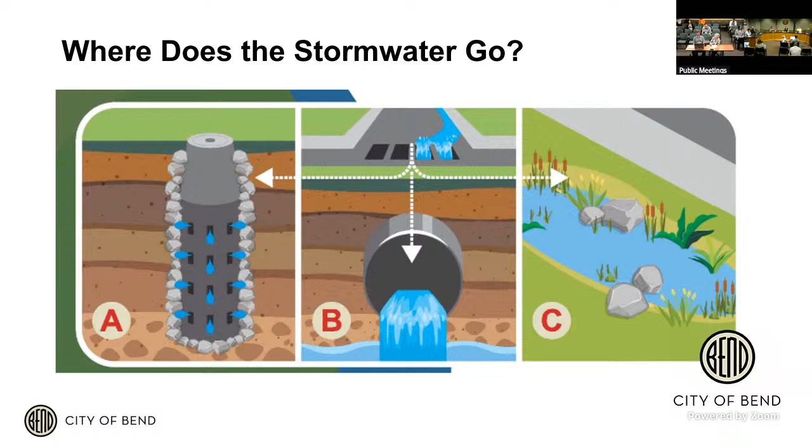So again, fairly dispersed. It doesn't go in a pipe that goes to the treatment plant, and that's really important to understand here. Picture C shows the idea that in some places there are ways to cleanse that stormwater before it gets into the groundwater or the river. That's why we have regulations. The city actually has permits from DEQ for stormwater discharge and management, and I'll get into that on a different slide.

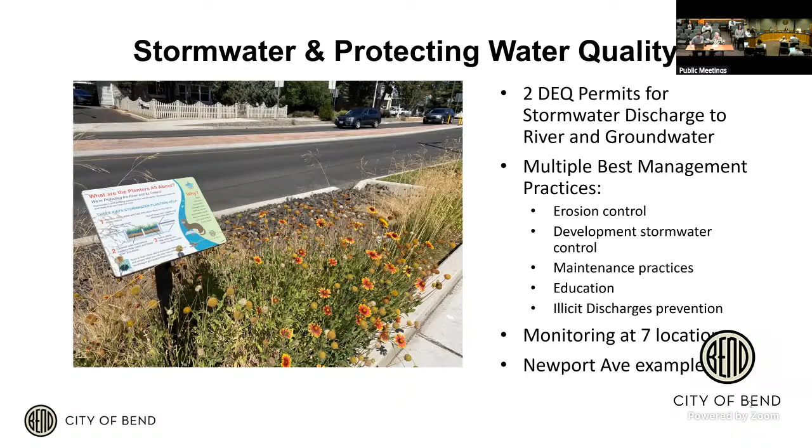We monitor at 7 locations across the city to see what the quality of the stormwater looks like. This picture shows the Newport Avenue project, which was largely a stormwater project that we then added other elements onto. So that's it for me, and I should hand it over to Austin to tell you what's now going to be in the master plan. Just wanted you to have a little context of how the stormwater system works.

Thanks, Lori. So today we're going to give you a brief update on where we're at right now with the master planning process, and here's a look at the topics we're going to get into. Like Lori mentioned, similar to a water system master plan or collection system master plan, the stormwater master plan is highly influenced by the 2 stormwater permits. And as she showed and demonstrated, our dispersed system kind of separates from that water and sewer collective network that we have.

The purpose of the master plan effort was to provide an update to the 2014 stormwater master plan, and primarily to identify the capital improvement program. So like Lori mentioned, the 2 main efforts were to identify projects that will, first, improve drainage issues that we have throughout town, and second, identify water quality improvements we can do for discharges into the river. Along with those core capital program efforts, we also took a look at a handful of policy topics, mostly climate change, drainage and density, and level of service that we'll get into here.

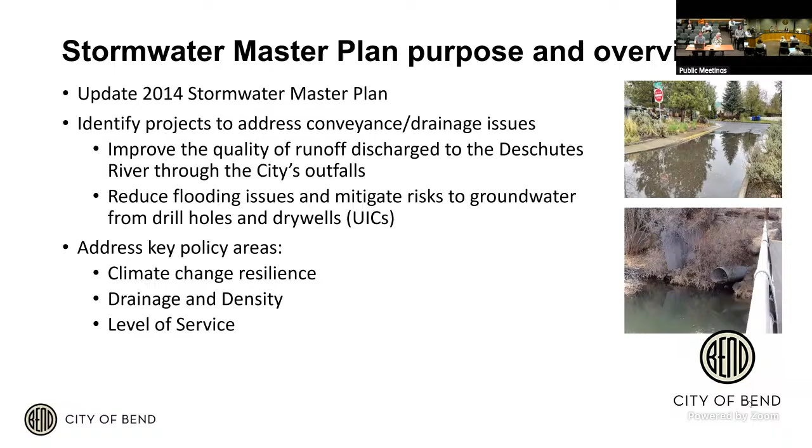So right up here we have an overall timeline. I printed some handouts, so I'm not going to get into too much detail, but if there are any specific questions about our timeline and process, I'm happy to answer some questions here at the end of the presentation.

During the project, we did a number of outreach efforts. The primary audience we worked with was the Water Advisory Group, and they were really our main sounding board of external stakeholders throughout the community, from our visioning to establish our values, and then through our scoring and evaluation of these capital projects.

They were the major sounding board that we had, but they also weighed in on some of those policy topics that we mentioned. Amongst the other groups, we had a roundtable discussion with some of the local engineering firms in town, thankfully held by AKS. We did a presentation to COBA, giving them an update of the draft findings and efforts that we were doing.

Internally, we had a lot of discussion, not only workshopping to identify the issues and problems, and reviewing some of the capital projects, but also particularly with the drainage and density policy topic, working with our engineering planning groups to dig in a little bit about some of that topic.

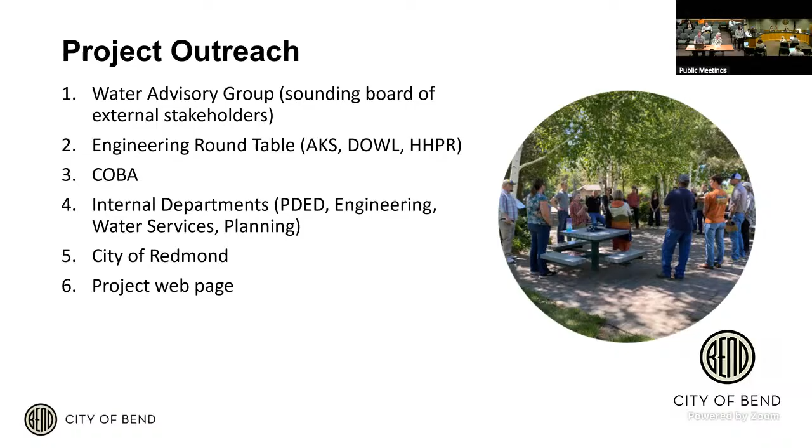All right, so onto the capital improvement. Again, this is really kind of the meat and potatoes of a master plan. Taking it all the way back, we did a series of workshops to identify the issues, and then identified our priorities — what were the things that we really wanted to weigh in on to help score these projects.

From there, we basically developed a matrix that we then ran all of our known issues through, and ultimately that provided us a list of capital projects. You can see a snapshot map here.

The blue and the orange stars distinguish between a drainage project — more of a local flooding risk perspective — whereas the orange identify projects that have a water quality focus, or a combination of the two. Most of those are discharges to the Deschutes River.

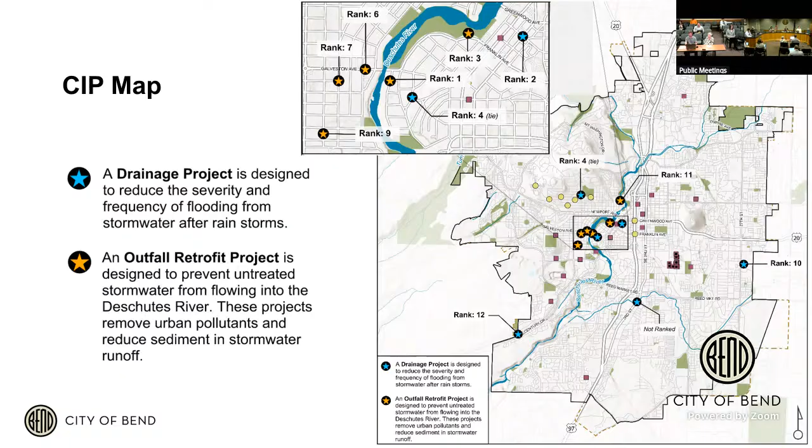Here you're going to see, and I want to emphasize, this is a draft of the cost evaluation. So we're developing these — what we're calling toolkits, cut sheets for all these different projects, given the overall issues, approach to solutions, and high level cost estimates. We're working on finalizing these in the coming weeks.

So overall, we're seeing roughly $22 million in capital implementation over the next 5 to 10, possibly 20 years, which does correlate with our current budgeting.

Aside from the major capital projects, we also looked at some programmatic solutions, breaking into two main categories: those underground injection controls that Lori was talking about, either dry wells or drill holes, and also a major maintenance program for some of the issues that didn't quite tip the scale of a capital project.

Taking a look at the underground injection controls, the two main categories we found are drill hole decommissioning and retrofit program. This is primarily focused on groundwater protection. If you recall those astropop-looking time of travel maps, a lot of the 17 highest priority drill holes identified were ones in those 2-year time of travel zones to our municipal wells. That's what really brought those to the highest focus.

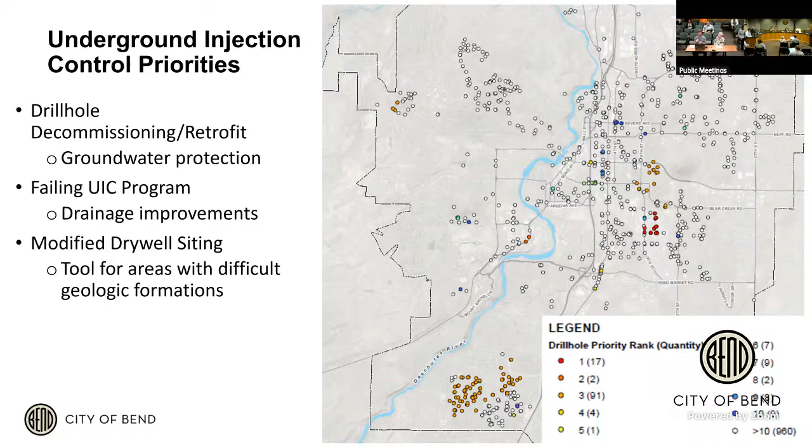So the other programmatic solution we looked at is major maintenance. These are nuisance issues that we've cataloged through the workshops, but could potentially be done as synergy opportunities with other capital projects, or even solutions implemented in-house. So what we're going to be providing is, along with our GIS layers, basically summaries of these locations and issues and contexts that we can hopefully start to put solutions into place.

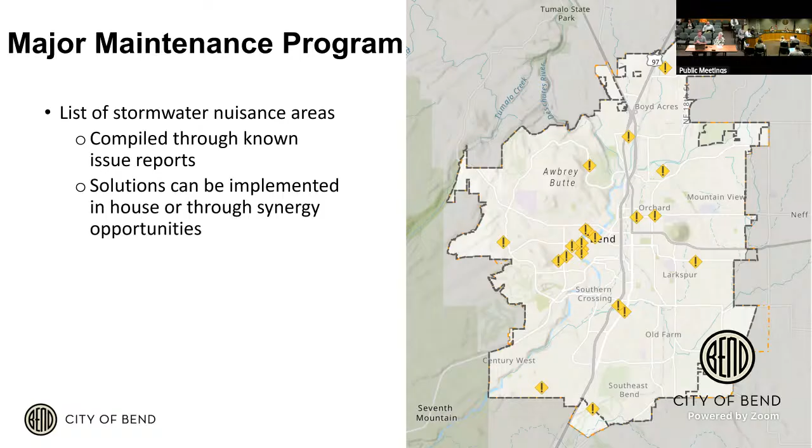Now I'm going to move into some of our policy recommendations. And the first one we looked at is climate change.

We first wanted to get an idea of how the changing climate is going to impact the stormwater to the city of Bend in the future. And what we found out was that Atlas 2 is the current NOAA forecasting of what the precipitation in Central Oregon is expected to be. This is the basis of our design criteria.

So when either privately or publicly you design stormwater systems, you base them on these storm events. Well, this data was last updated in 1973. So one of the major takeaways from this is that we need to update our data for today.

Looking forward to the future, we're looking to have an actual increase in overall precipitation of around 6% annually. But more importantly, the intensity and frequency of these storms are only expected to increase. You may recall in the last couple of years, especially on South Awbrey Butte, we've been seeing nearly half of the 24-hour storm event show up in 20 minutes. That has a completely different and dramatic impact on how our stormwater systems can handle this precipitation.

So trying to just establish awareness of this, and as we move forward, start to consider how we can change our standards or incorporate this into our design. We're also looking to have a decline in our snowpack, and the shoulder seasons are looking to get more stratified - more intense winters followed by really dry summers.

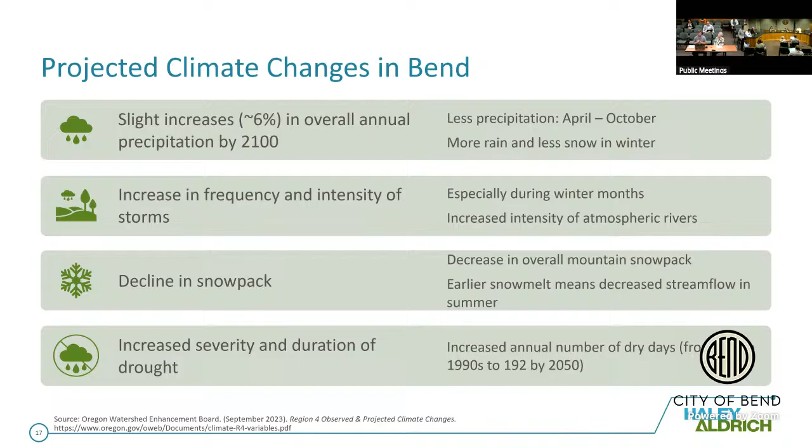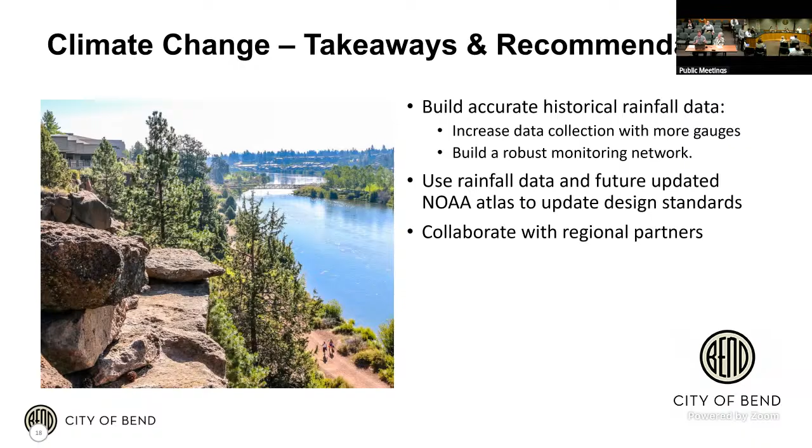One thing that's interesting coming out of this, particularly with the data that we found out is really outdated - we've been working with our water conservation group and, with the Bureau of Reclamation AgriMet, they're in the process of providing us 6 additional monitoring weather stations that we can put throughout our town to get better data that we can then hopefully use to update our stormwater precipitation storms. So basically the summary of our findings is to get better historical rainfall data and collaborate with our regional partners in those efforts too.

The next and probably most robust policy topic we went into is drainage and density. This one really most directly relates to our housing goals. As we've seen this increase in density and development on these single family lots, now accommodating multiple units, we're just seeing that lot coverage increasing. And that ultimately yields more impervious area, which means more stormwater runoff. So we're trying to figure out how we can best fit these stormwater facilities on these sites.

We're finding a lot of these sites aren't really managing the stormwater well. We're seeing runoff into the public right of way or onto neighboring properties, causing local flooding issues, erosion into parks and common corridors, and ultimately a large burden for the stormwater management group. So we wanted to look at what may be a better or more holistic way to manage this stormwater.

So what we did is we actually took a look at our existing code, and what we're going to be recommending with the master plan is really some immediate action items and then some future continuation of what we started with the master plan. The first would be just a real increase in our regulatory compliance in these kind of onsite stormwater management facilities, a higher early-on evaluation of stormwater management all throughout the development process, but also confirmation that these facilities are performing. A lot of that is directed and governed through our stormwater permits that Lori alluded to earlier.

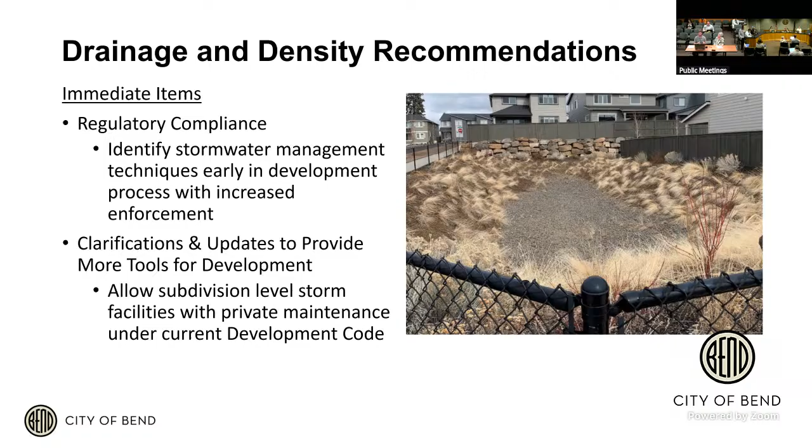That manages multiple private lots. So we found the code actually does allow for this, encouraging upfront a higher level of awareness and discussion about stormwater management. But then continuing the conversation is looking at potentially moving towards a larger centralized approach that would be owned and managed by the public. So these would be city-owned facilities.

It would allow for multiple private lots to drain either to those larger swales, infiltration ponds, UICs, and ultimately become city-owned to manage. So these would most likely be put in at times of infrastructure and subdivision developments, and also looking at possible options of fee in lieu for some of these small infill sites or area-specific special planned districts, like the Bend Central District.

But this is going to require more conversation internally to make sure the planning department, the private development and engineering department, and the water services group all get their appropriate input taken.

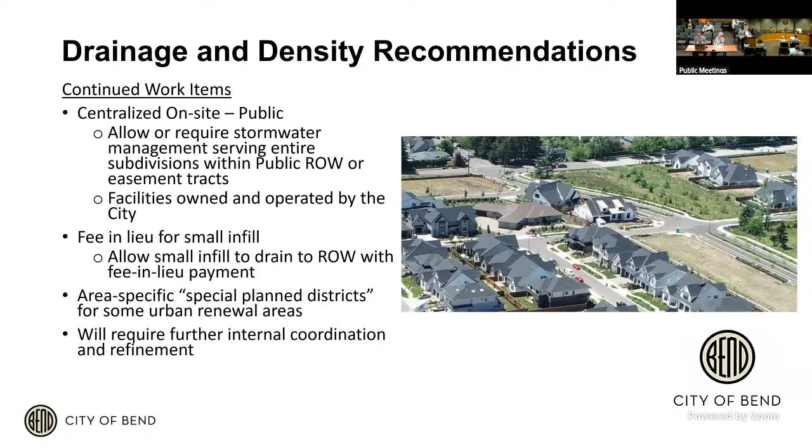And with that, I will pass it back over to Lori to talk about level of service.

I'll be real quick on this one so we can finish up and take questions. But it's really important for us to think about the level of service we're providing with the whole stormwater program. That relates not only to whether our customers are getting an appropriate level of service, but are we meeting our permit requirements for maintenance and management? Level of service will then relate to cost of service, which then at some point becomes an input to options when a future rate study is completed.

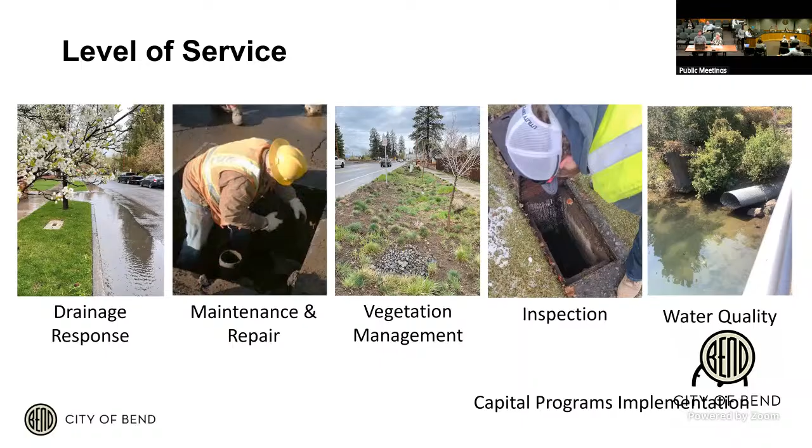This just lists across the screen some of the things related to level of service. There are a lot of aspects to owning and managing a system. We have to think about whether we're doing a good job now, and also if we allow for more regional stormwater management facilities that the city might manage and maintain, there would be a cost to that, and how we would accommodate that within our existing system.

So this is just talking about, should we be reactive or proactive? We actually feel like in a lot of areas we do a pretty good job of responding to stormwater complaints and issues now—we get on top of them—but we can't always solve the underlying problem because we don't have some of the programmatic, major maintenance program areas that we probably need to solve those. There's also a concern about whether service levels are in fact starting to reduce because of system growth and not any increase in staffing to manage the maintenance of the system.

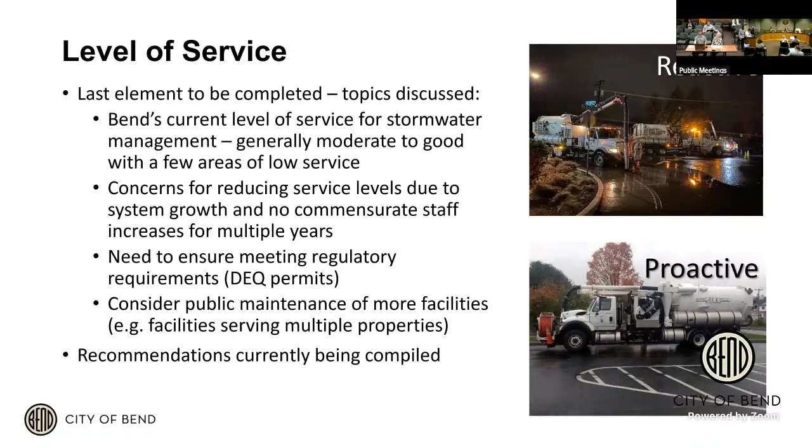So looking at next steps, we're looking to have a draft completed here in the coming weeks. That's going to get internal review, go back to our stakeholders, and then we'll post some findings on the webpage. Initially we were proposing to take this to council in September, but recently we found we'll have to basically abridge this to create the public facility plan, to make sure there are no contradictions with the comprehensive plan, which the PFP is an appendix to.

So the actual date right now to bring this to council was initially thought to be September—maybe a couple months after that to get the public facility plan finalized—but then further cost of service evaluations into the next rate cycle. So with that, I'll take a pause for any questions.

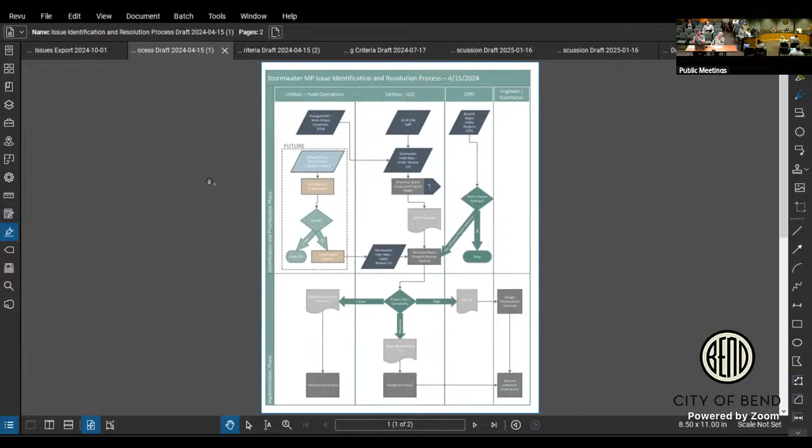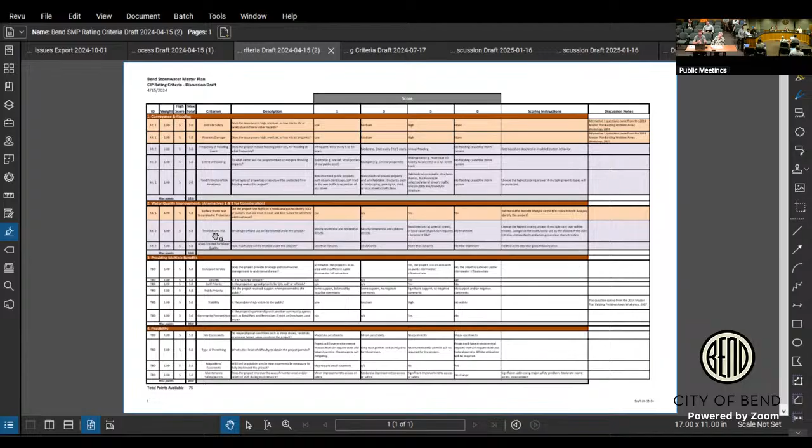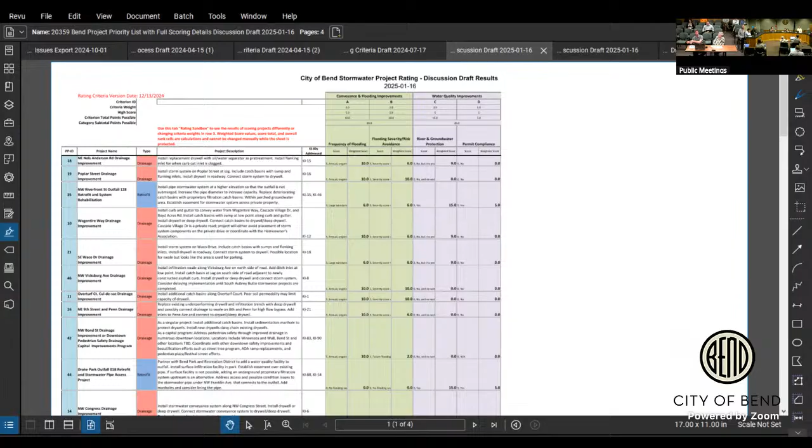This is kind of what we have on that specific scale of catch basin problem. And if people have an issue, Bend Works is the best avenue to submit complaints.

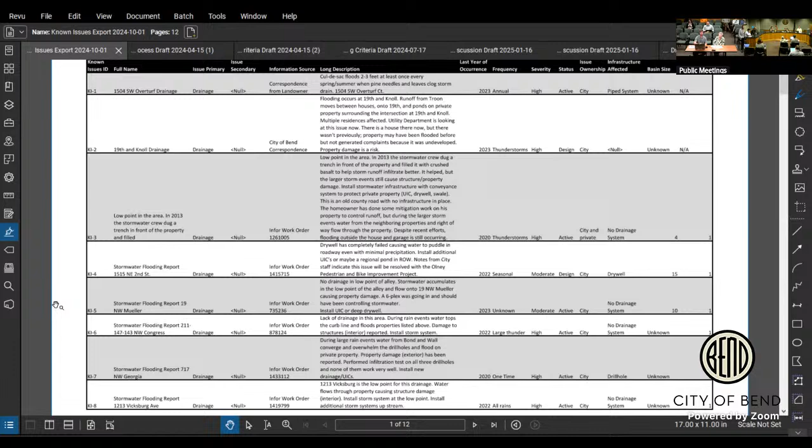Maybe one more question, building on Ariel's line of questioning - do we have street standards that allow for, say on a quiet neighborhood street, swales on the side of the street as opposed to curb, gutter, catch basin?

Wow, Janet. Is this a lead-in to a discussion about updating standards? That's gonna be my public comment to add on. No, this is where it all overlaps, right? And we have an opportunity to certainly do that.

Most of what you see is kind of main standards where we have curbs. We used to allow private streets that had swales, we don't allow private streets anymore, but we are trying to get more of it. We call it part of the low impact infrastructure, putting these elements in there. So those are the types of standards we want to continue to look at.

I think doing this work identified we probably need to get creative in order to resolve more of these issues, especially the one-offs. They also overlap in different areas with the biking infrastructure - some of those complaints are in ponding areas in the bike lanes and things, so it all kind of integrates.

The one thing I want to get on council's radar is the connection to when you start looking at the density we're going to get around town - how the city's been built to this point needs to start to shift, because as Councilor Mendez says, everything's getting tighter, smaller lots, smaller things. So the need to come up with more regional solutions or area solutions, which will require the city to step in more and maintain those, is a different level of service than we've provided in the past. There's no immediate thing that needs to be done about that.

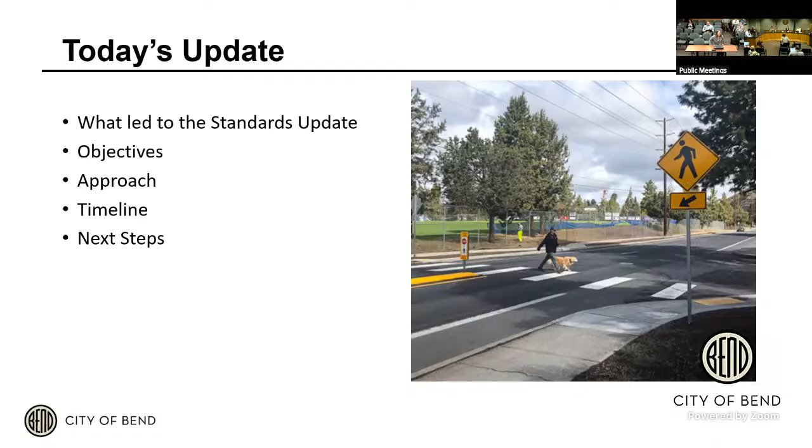So what we'll talk about today is what led to the standards updates, what we're trying to achieve, how we're going to approach it, the timeline, and next steps of how we're going to work through this. As council's aware, there have been a lot of discussions, whether it's policies of what we allow across the city, and detailed project discussions around elements of capital improvement projects. Those range from where and why do we put raised crossings, and how do we get people across our major roads safely.

A lot of conversations around how do we control speeds around the city, how do we introduce new things. We know there's interest in looking at residential modal filters, quick builds and pilot projects, and then also conversations around our cross sections and development requirements.

So the need for the standards update is, from staff's perspective and what we heard from council, that the city's deployed several different concepts over the past several years. We've also been dealing with the policies adopted in our TSP, our transportation system plan, and how those got related to our standards. But we have a lot of different things out in the field right now, and we know there's interest in taking those standards and developing them to another level.

So staff's objective is to adopt clear standards based on feedback and operations on what systems we're using and where we're going to deploy those throughout the city. We know there's a lot of interest from the community and council around safety, mobility and speeds. We want design tools to come in as more standard options, especially if we're going to start selecting products, so we know what tools we want to implement, and so David's teams can easily maintain these without 20 different systems, different delineators or different Dura Curbs. Then the other conversation is related to cost and implementation challenges with infrastructure requirements for different housing types, especially infill.

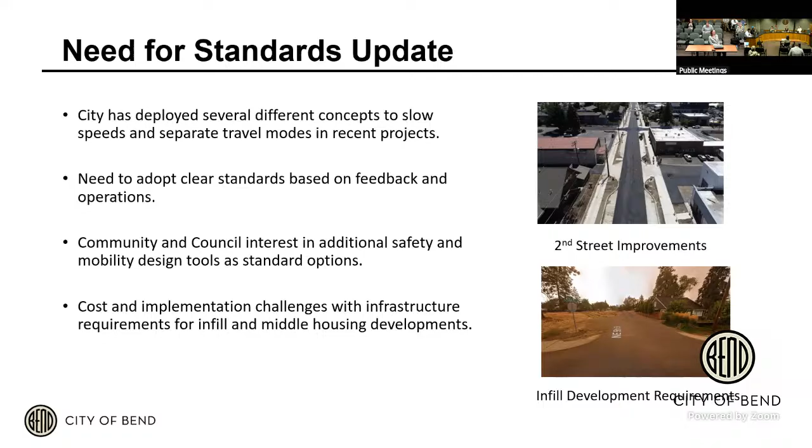So the objectives, based on feedback we got from council and staff input, are making sure we're putting the right users on the right roads and building them accordingly. We are still implementing the current 2020 transportation system plan policies, but we're also building to the future. We'll talk about how we're going to do that, because we're still grounded in our last transportation system plan.

We want to review the right-of-way and street section standards. We know there's a desire to look at maybe some thinner sections, both in right-of-way and street widths. We want to increase safety through looking at vehicle speeds, separation protection, improving safety at major crossings, and making sure we have travel time reliability on the system. And how do we define that?

We also know there's a desire for faster implementation around quick build and pilot projects, and conversations around wanting these low-cost solutions, but we don't want to sacrifice quality or durability when we go do these things. We want to reduce costs and timelines for infill and housing as it relates to infrastructure. We also know there are a lot of interested parties in having this conversation, so we want to make sure we involve that input. I'm going to look to Janet, please add as we go through.

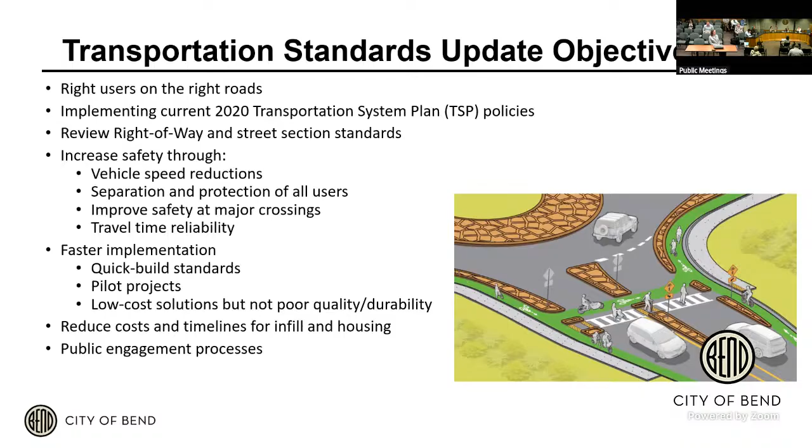Here's some examples of what we're talking about and what we want to do with that. On the technical side, we want to introduce new cross sections into our standards and development code, so they can be used appropriately, making sure we know the rules of engagement on where, how, and why those different cross sections can be used.

I love the tool Janet came up with around a slow speeds toolbox - how do we use and deploy those around town? We talk about raised crossings, speed tables, and modal filters. We know there's interest in our streetscape standards, so lighting, mode separation. Also, how do we make sure there's clear direction on how we work sidewalks and paths around existing trees and things like that.

We have several design guides, which Janet can go into - you see one right there. We have a complete streets manual referenced in our standards and specs, but we think there's elements of that which should actually be pulled into and be part of the standards and specs. Same with our roundabout design guides and things like that.

Also make sure that we have rules of engagement. We know the other part of speed management is speed limits, designations, and zones - where we put those and how we can adjust them. Make sure our standards match those desires. This is more on the technical side - we want to reduce the need for waivers and design exceptions, both through our capital projects and private development projects, to simplify the process they work through for some design elements.

On the development code side, we specifically want to talk to council around the sidewalk fee in lieu, especially for infill projects. When you have onesie, twosie developments required to build sidewalk, how do we want to do that in an area that may not have a complete system? And then again, talk about those infill infrastructure requirements to make sure we're achieving council's goals of how we want to build areas of the city that don't have all the key infrastructure already in.

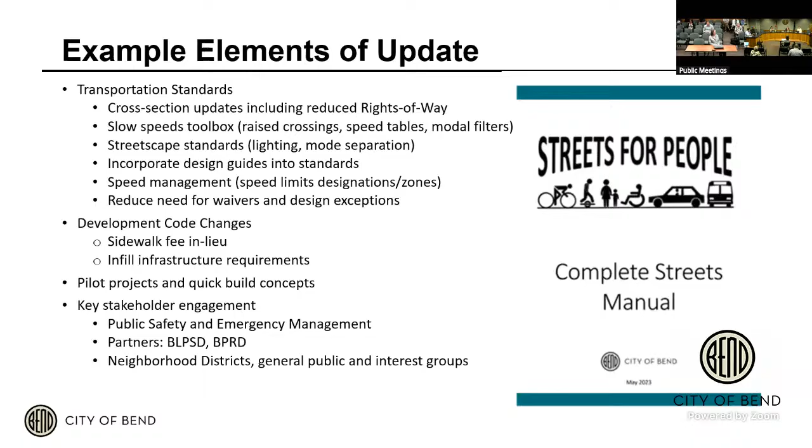So how will we do this? We're going to really break this up into 3 phases.

In the near term, over the next year, what we're going to be looking at is there's a list of things that we want to just administratively update in the standards. That is largely under Ryan, who's our city engineer, his direct purview, to make sure the standards are working as seamlessly as they can, and things we can just incorporate administratively.

We want to do that as quickly as we can. Along with that, we will start to develop our public engagement and the consultants we need for phase 2, which will really kick off in the fall, where we want to have a facilitated discussion with the community and with council around some of these bigger, community-wide topics around street sections, safety and speeds, and the development code updates.

And then we'll also determine with council where we want to reprioritize our transportation project funding. We talked about this at the last work session a little bit as just a concept around that with Franklin and the Midtown crossings, but we know we need to have a much broader conversation around the next prioritization of projects, especially around the GO bond.

But with that, we also want to work with council to determine, do you want to set aside some money to do some pilot and demonstration projects, and how much and for what. Because we can incorporate a lot of things into the standards, we also need to make sure if we want to deploy those on the ground, where are those funding dollars to do that, and how big or small of a scale do we want to look at with some of those pilot projects, which we can answer questions to.

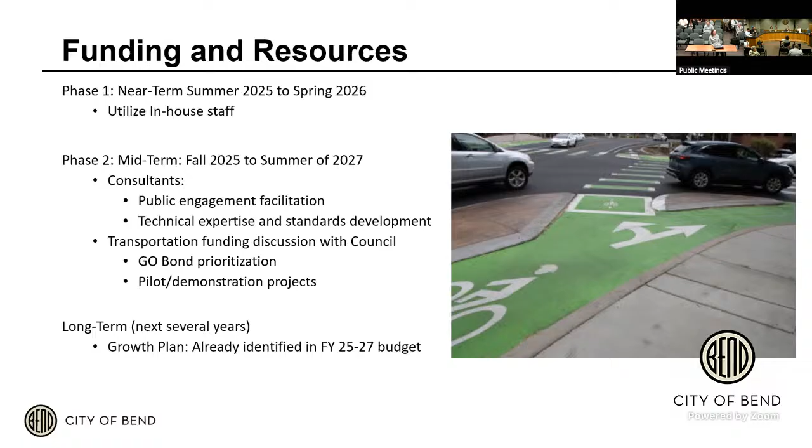So that's just a real quick overview of what we're trying to achieve. And we're here. Janet, I don't have anything to add on how we want to approach. Janet will be, along with Ryan, heavily involved in the process as we go through at all stages. And then we'll also bring our development code team in as well for those development code updates, Pauline and Colin and Renee.

I just want to make sure this phase also includes public engagement, or at least a public comment period. And maybe even this committee, the subcommittee, gets a chance to see what those public comments are, and either advocate for them being included in the administrative standards or raise them for a broader conversation. Yeah, exactly, that's a good idea. I just want to make sure the standards update isn't so narrowly focused that we miss low hanging fruit.

The other thing I'll say too is as we go through this, we may, instead of doing big updates, bring smaller pieces to try to move things through faster. A lot of times we start to bring these across not only the administrative, but also the larger conversation. Like if we get cross sections figured out, let's just get those drawn up and adopted so we can start using them while we're having other larger conversations.

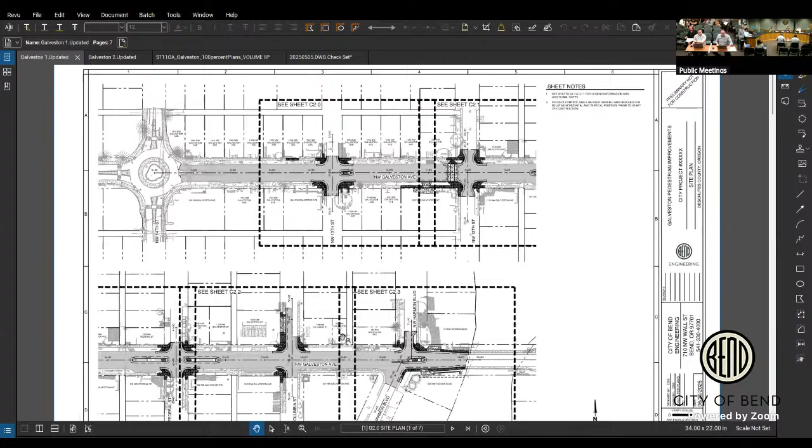So this is the cover sheet that everybody should have in their handout, the first one you'll see. As you're going through, would you mind pointing out what would be self-performed work versus what would be bid out? Absolutely, happy to highlight that.

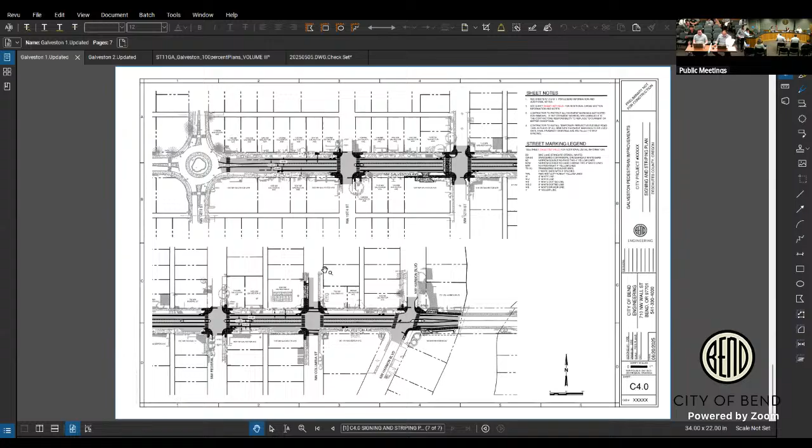So the cover sheet, for the non-engineers in the room, shows how we break down our designs. This is the corridor overall, and each accompanying sheet breaks it down per specific area with a lot more design detail. Toward the back, you have a proposed signing and striping legend showing the widths of the bike lanes and buffer, as well as the center island median or turn lane that will be maintained.

So starting up on the north end by 14th Street on Galveston, you can see a lot of it doesn't have any bold coloration. The project coming out of the roundabout on the north side is going to basically stay the way it looks today, with existing sidewalks and existing crossing at the Galveston roundabout.

The paving limits will land somewhere in there. We'll work that out with the street preservation team in our transportation and mobility department, but we'll pave up to the limit of the roundabout, which is why the road is a different color than the roundabout — you're just seeing the grinding inlay, basically from 14th to 13th.

I just want to add, this year we're doing Galveston west of 14th. So there is a street preservation project west of the 14th Street roundabout occurring this year. And there's also an NSSP crossing at 15th, and bikeways as well.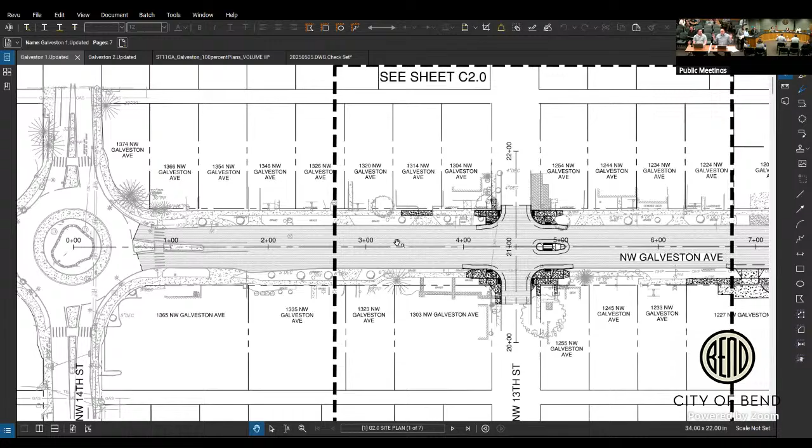Further down at Flag Line or so, to slow speeds down before entering the Galveston corridor — thank you for bringing that up, that's a good point. Before we dive too deep, taking a step back, Galveston is a corridor. We're really looking to do something near Flag Line or 17th, as you transition from those deep, wide canyons into a residential area, to identify a way to slow speeds down somewhere over there.

Then we have a pedestrian crossing as part of our bend bikeways and key route system around 15th Street, which we'll be talking to you about at the July council meeting — we'll give you the full overview of the bend bikeways as well.

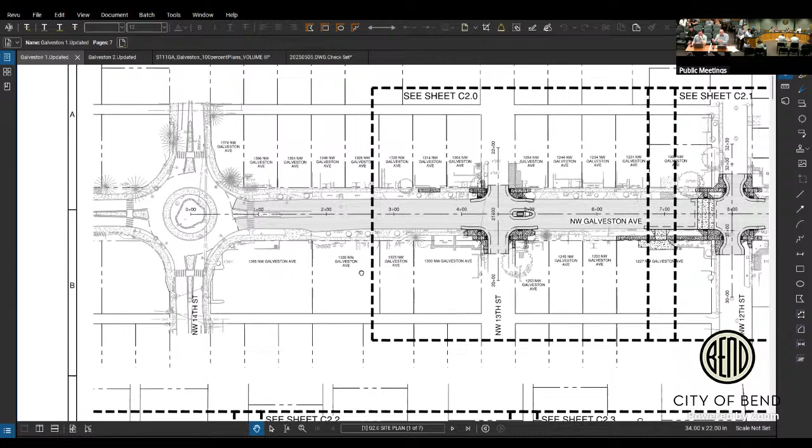And then the roundabout at 14th Street, a raised pedestrian crossing at 12th, which I'll describe in more detail, and some other crossings along the way on Galveston, and ultimately likely a raised pedestrian crossing at Riverfront to get you over to Drake Park as part of the Riverfront project or one of the other accompanying projects — the connection of the Deschutes River Trail to finally make that raised crossing through there. So that's the corridor approach we're trying to tackle here as staff.

Most of that's already programmed in over the next couple years, so we'll continue to move forward with a lot of that.

Now narrowing the focus back down onto Galveston, on the north side you can see the first thing we're going to be doing is in front of 1314 Northwest Galveston. That's why the sidewalk is hatched out right there — that's a piece of existing sidewalk we've identified that is either non-ADA compliant or just in bad shape and needs to be fixed.

Yeah, and if you've walked the corridor, you'll be very familiar with some of these. Some of them are just in horrible shape. So there's a stretch of sidewalk we're proposing to rebuild. Stuff like that, Councilor Franzosa, is exactly what we'd be looking for internal staff to do with our transportation and mobility department. I'd put our internal crews on par, if not better, with a lot of the contractors in town, and we can do it for a lot cheaper.

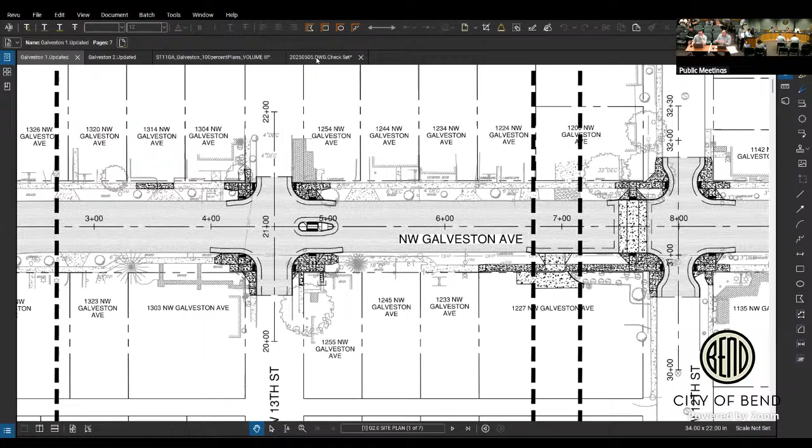So missing sidewalk portions, things like that, we're looking to self-perform. And then you get into the intersection there at 13th, and this is really where you're going to start to see some changes compared to what it is today. So every one of those corners is highlighted because every single one of those ramps is non-compliant today. So we need to make those ADA compliant. So we're tearing out those ramps, putting in new ramps, connecting back to the existing sidewalk the best we can.

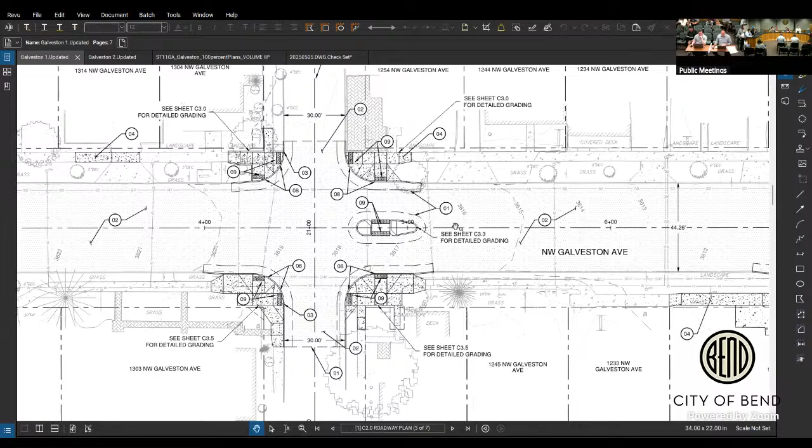And then a key highlight is a pedestrian refuge island right there on the east side of 13th Street for a crossing there. That allows the pedestrians to only have to look one direction at a time. Then you can go out to the center island median, pause, look the other direction, and then get safely the rest of the way across Galveston.

Then continuing to move to the east, you can see on the north side, there's another gap here, not a whole lot of improvements to be made to the existing condition.

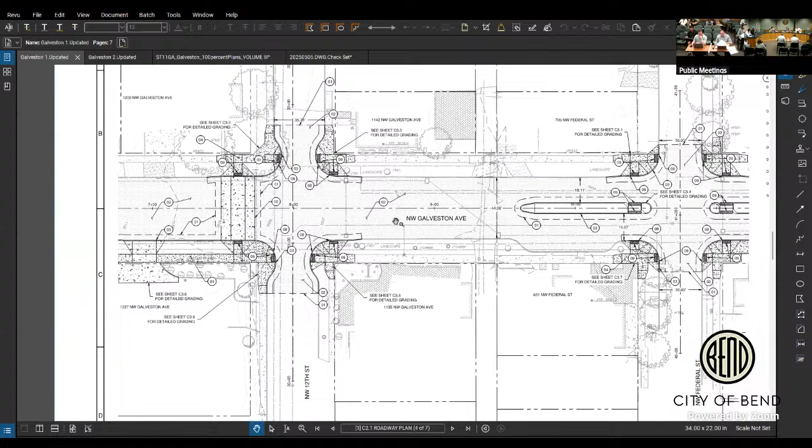And then it gets a little bit more fun over here when we get to 12th Street. Or excuse me, we got Federal first, don't we? 12th and Federal, yeah, it changes names like most things in the city. And you'll notice too, when we kind of went through quickly, but this is Brother John's right here.

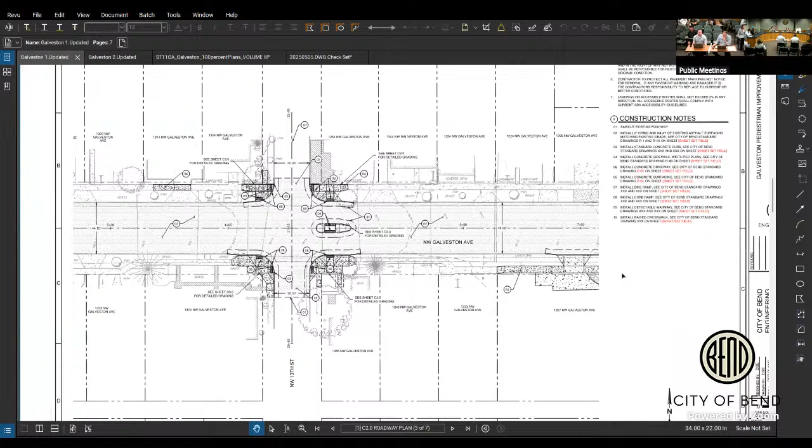This little chunk of sidewalk here is so obliterated that we felt, even though we removed the sidewalk from the scope of this project for the most part, the areas where it was basically just straight gravel, we are still proposing new sidewalk, which is why you're seeing some of the extra limits here. So at 12th Street, again, non-compliant ramps.

Where I've identified this as a key crossing location, it has a history of accidents between vehicles and pedestrians through here. High volumes here due to the attractions of the different businesses around this corner.

So what we're proposing, a little bit kind of talking into the earlier discussion about what can we do now that's a little bit non-standard? We're proposing a raised pedestrian crossing here at 12th Street. So that basically means as a pedestrian, if you're at sidewalk level, you would stay at the same level. You wouldn't ramp down to the street and cross and then ramp back up on the other side. You would stay raised. For the vehicles, it's going to act very much like a speed bump.

It's just an elongated one. We have these around the city and other key locations in front of schools, in front of parks. We've built many of these as part of our neighborhood street safety program. But we've identified this on the west side of 12th as being a key spot to not only keep the speeds down, but to provide a safe pedestrian crossing to traverse north-south on Galveston.

Can I ask you to add a couple? Can you please add your discussions with public safety, especially fire, around implementation? Yeah, as well as lighting.

Yeah, so anytime you put any type of obstacle, well-intended or not, into the right of way, it impacts our fire and EMS response times. So this is one that we've had a lot of sit-down meetings with our fire department about.

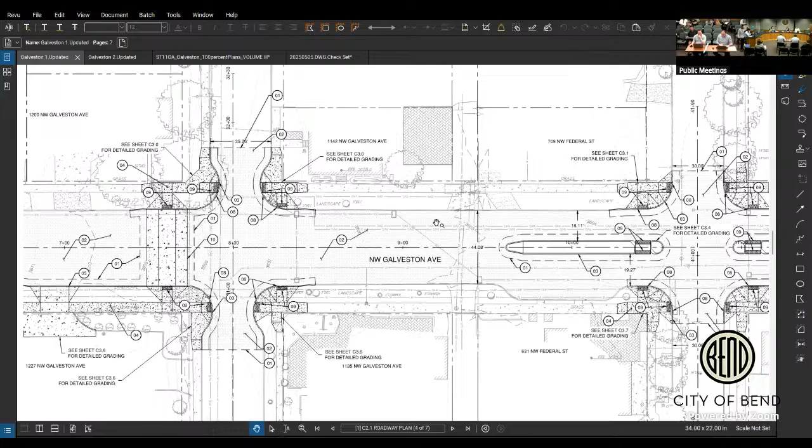So continuing on the north side, between 12th and Federal, a lot of that's going to maintain. And then we get to Federal, where you're going to see some more ADA ramps and improvements, as well as an area where we don't feel there's a high demand for turning movement, so we have a longer pedestrian island, which also helps slow speeds down.

Again, this introduces another conflict for fire and EMS. If we can do this in narrow stretches that allow vehicles to get out of the way so they can come through, generally that's okay. We do want to be careful about not doing this in too long a stretch where a vehicle might get stuck in front of a fire truck or ambulance trying to get by and have nowhere to go because there's a median and a curb. So again, trying to find that proper balance.

But there is more traditional, to your point Councilor Perkins, on both sides of Federal here, east and west. We've identified a standard pedestrian refuge island, not raised, but down at street level, so you can cross either side here at Federal. What this is going to do, though, is there's an existing turn lane right there.

So if you're making a left turn from Galveston onto Federal, or north onto Federal, instead of having a little turn lane to sit in, you are going to be sitting in the through lane, so you'll have to wait for through vehicles to clear before you make that movement. This is going to add a bit to the congestion side, but the turning movements off of Galveston aren't so high that we feel this is going to back up for 2 or 3 blocks. It'll back up for a little while, but there are enough gaps along Galveston that you can make those movements without causing blocks and blocks of holdup.

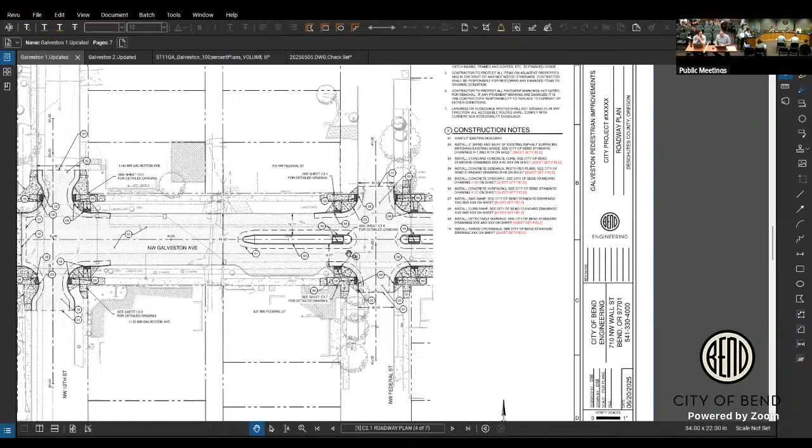So yeah, more pedestrian crossings, more ADA ramps there on the north side as you cross Federal. And then crossing Federal down to Columbia, you can see there's some more ADA ramps and crossings there. Oh, I forgot to highlight - I'll hit it when I come back. There are some improvements going north up Columbia a little bit just to tie into the existing infrastructure, some additional sidewalks and stuff right there by 1008 Northwest Galveston. But again, on the north side at this point, the proposal is mainly just ADA ramps and setting up the safe crossings.

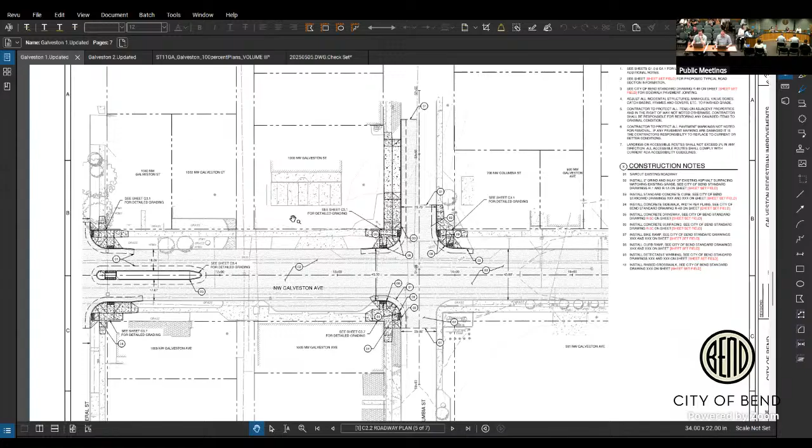So to finish off on the north side now, we're going to get down to Harmon. There's been lots of historical conversations about what to do with the Harmon intersection. Everybody knows there's a lot of people that kind of shoot through this intersection, either moving north-south or south-north. Despite the signs that say don't do that, it happens. So we're proposing to build in some restrictions on the turning movements there. So if you're on Harmon and you're wanting to get onto Galveston, that's going to be a right-only turn. You will not be able to turn left from Harmon onto Galveston, nor will you be able to cross Galveston from north to south on Harmon.

And that's what's highlighted by the pedestrian refuge island, as well as that little extension that pushes to the east. That's like a ribbon curb that'll keep people from being able to make that north-south or south-north movement. So yeah, ADA ramps, a pedestrian refuge island, again at grade with the vehicles, and then some additional sidewalk improvements as you enter onto the bridge, just to make sure we're replacing the old and aging sidewalk through there.

So jumping down now to the south side of Galveston, and we'll work our way back up the corridor. There's a major obstacle that exists today with that existing retaining wall. I think a lot of folks who have maybe walked that corridor know exactly what I'm talking about. If you got it, we'll just show a quick picture of what that looks like. If you're on the south side of the bridge trying to walk on Galveston or the other way, you basically have to step into the road.

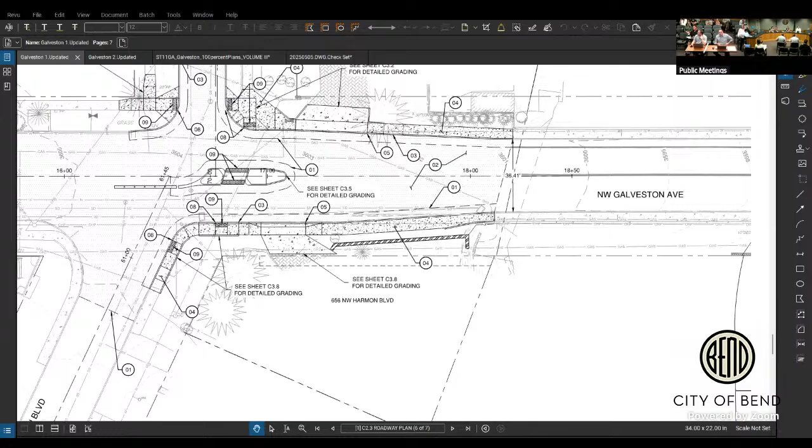We'll show that picture here real quick. But the idea is that we need to bump that wall back to the right-of-way line. Right now that wall is well out into the public right-of-way, and we need to push it back so that we can build some type of connected system through there. You can see there's other obstacles, like a power pole sitting right there. So we've got to be creative as we're coming off the bridge here trying to make that connection over to Harmon. That's one thing council has highlighted, they'd like to see us find a way to address that obstacle within our system.

That's going to be a big piece of this work, and one of the components we're likely going to put out to bid. We'd have a contractor come out and do that work and get a nice wall design done. Obviously, we would need to work closely with the property owner through there.

Back to the design, just a little bit more improvements as you turn the corner on Harmon. But then as you cross Harmon, you're right into the improvements that were recently done by the gas station there. So what you see in front of 981 Galveston at the gas station, with the wider shared use paths, that's the old design concept.

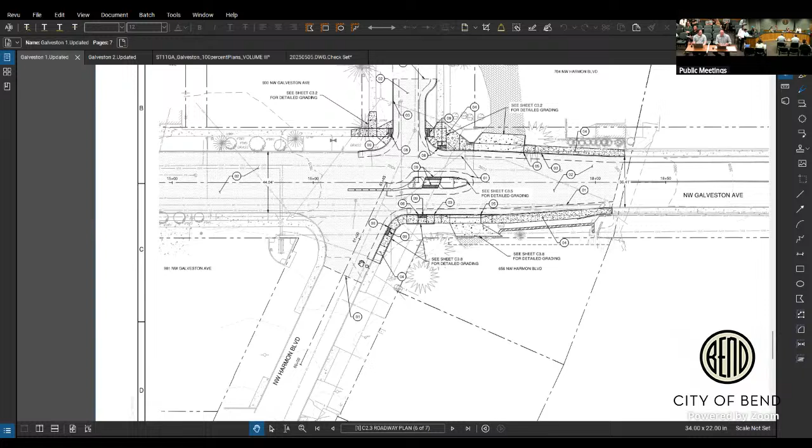That 8 to 10 foot wide shared use path is what was in the 2020 design. In the last 5 years, whether it's the gas station or in front of Sunriver Brewing, those have been built to the old design concept. We basically said, congratulations, developer, here's what you have to build, and that's what they were required to put into their land use. So what you see in front of 981 Galveston is already improved, and we obviously don't need to do anything more in front of that stretch.

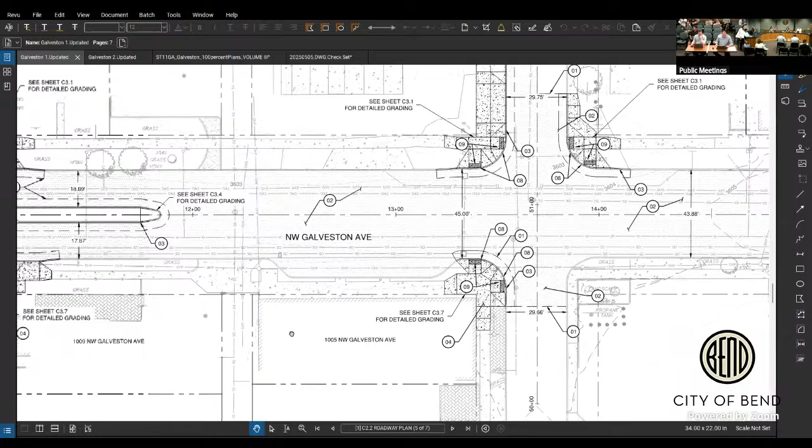Then you get back to the Columbia intersection. We've got some ramps there. You can see it's not on the southeast corner because those have already been rebuilt recently, so those are all compliant, but the ramps on the other side need to be rebuilt. Those are a little bit out of compliance, even though they're relatively new. But you can see we're not going to touch the on-street parking there—again, that was the old design concept with the parking bays, so those will remain.

And then you continue to walk to the west, you get back over here to Federal. We get back into the ped islands and the ADA ramps—I've already kind of hit on that, so I won't focus too much more. You can cross Federal, and then you're back to 12th. This is what I forgot to mention earlier.

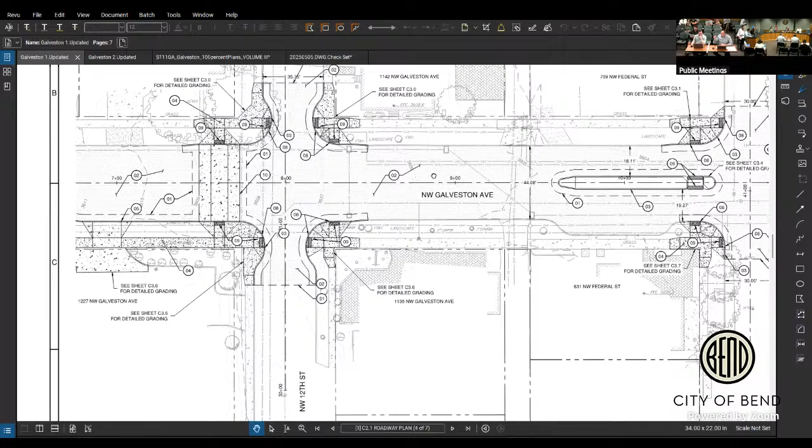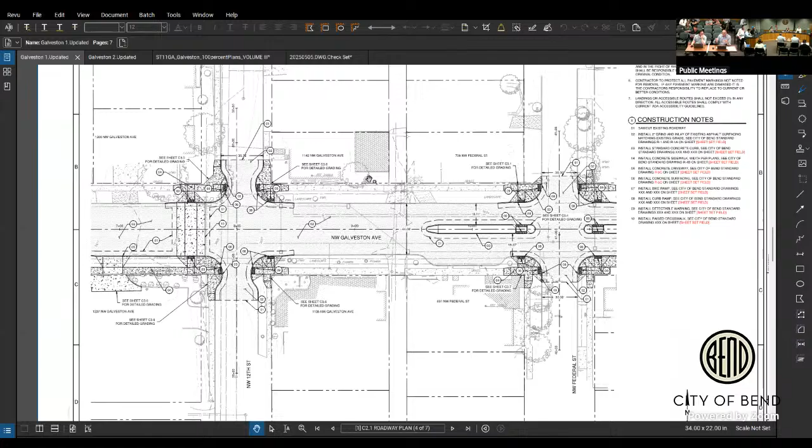You can see some of the other improvements on 12th Street are what we call bulb outs. We're narrowing down the crossing distance for bikes and peds. The existing curb is more of a straight shot through, and this is going to introduce some of those bulb outs. It allows for a little bit better interaction as the bikes and peds are a little further out in front of things than they normally would be. And as vehicles are looking to make those turns on and off of Galveston and 12th, you're going to be a lot more visible as you make those shorter crossings.

Lighting enhancements—you talked about that too. Yeah, we'll get to that when we get to the signing and striping and other stuff.

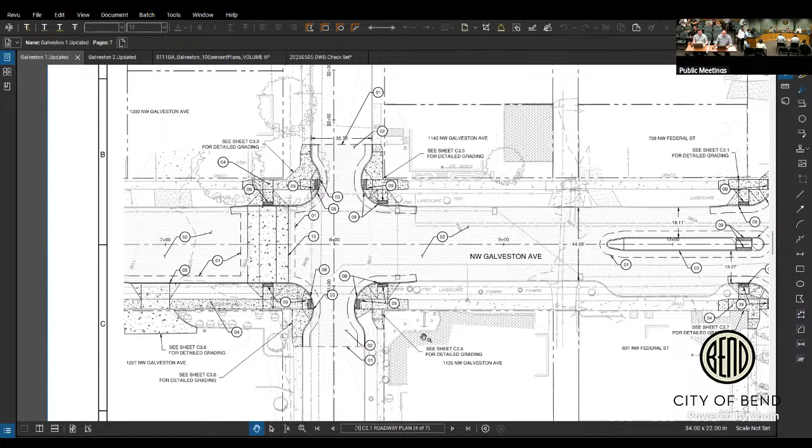And then you're back to the raised crossing there on the south side, and as Dustin mentioned, there's plenty of sidewalk work in front of Brother John's that needs to be redone right there because it's basically just gravel right now. So we'll come in and enhance that, fix it back up, and make it match into the existing sidewalk system that's through there.

And then you keep moving west and you're over to 13th again. On the south side, just some crossings, ADA compliance, and making sure we've got a way to help folks get safely north-south across the corridor.

And then you're back over to the roundabout at 14th Street. One other quick note is on those center islands, the other two being much longer.

The other reason this one's shorter is because we have driveway access points we have to account for. And so that's the other two islands. There's no driveways off of Galveston in those areas, so we're able to elongate those. And around those center islands, that'll be contractor work as well.

Yeah, good clarification. Anything we're doing from curb to curb on the road, the center island refuges, the longer extended medians, the raised pedestrian crossing, that's all something we would likely bid out to contract and schedule appropriately. Most of those, and we'll get into the signing and striping, and we can talk about lighting there as well. Portion of this design, which is page C4.0 at the back of the packet.

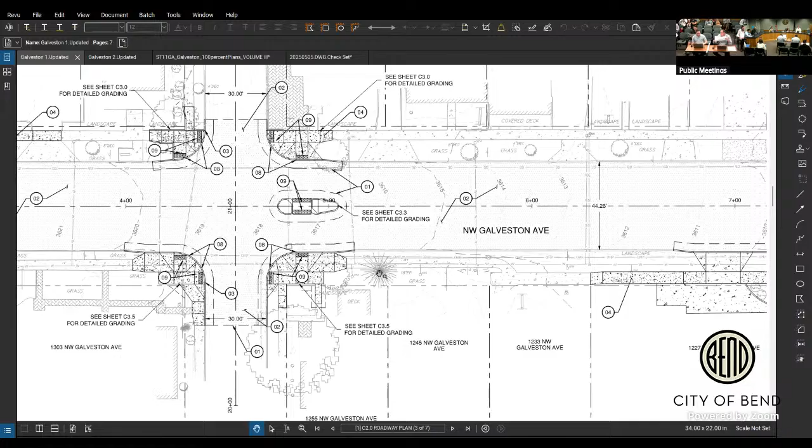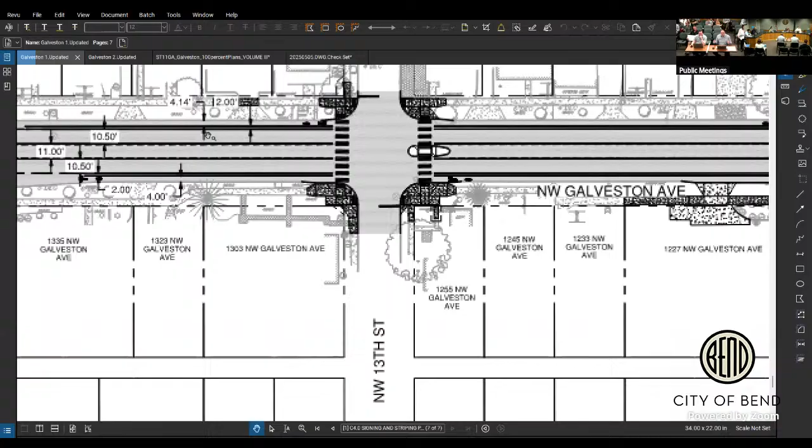Anything curb to curb, we would likely be asking the contractor to come in and do. And then the striping work would be done in conjunction with the street preservation work. So this is where it could get interesting, and I think people will have varying opinions here. Is the proposed section here, because we're not really moving the curb lines other than at 12th Street where we're doing the bulb outs. Otherwise, the curb lines are basically staying where they're at.

So we're basically going to take what we've got curb to curb width, and we're proposing to do somewhere between a 4 to 5 foot bike lane with a 2 foot striped buffer, and then a 10.5 foot travel lane. And where we don't have the median or the refuge, it would be an 11 foot travel lane to help maintain these turning movements, since delivery trucks sometimes have to park out there and other things. And then we mirror that on the south side with a 10.5 foot lane, 2 foot buffer, and a 4 to 5 foot bike lane.

So that's going to look different than what it is today, where you have a single stripe and wider lanes. So it's going to feel narrower. That being said, we're cognizant of the fact that these striped buffers, after 6 to 12 months, that interior stripe basically disappears because everybody just drives on it. So we're looking into ways where we could further enhance that line without restricting the ability to turn into driveways and alleys and other things through there.

So we haven't landed on what the solution to that is yet. We've got examples around the city of things that we've done and tried. DuraCurb is one of them - that's what's on Wilson. We just opened Portland back up, which is just a long row of the vertical delineators. So there's different things we need to further explore as we dive into what this is going to look like moving forward. But we do want to be cognizant of the safety, especially if we're not doing the wider shared use paths. We're basically telling the bikes to stay on the roadway, which means we need to enhance the safety of those bikes that are going to be traveling next to the cars in these narrower lanes.

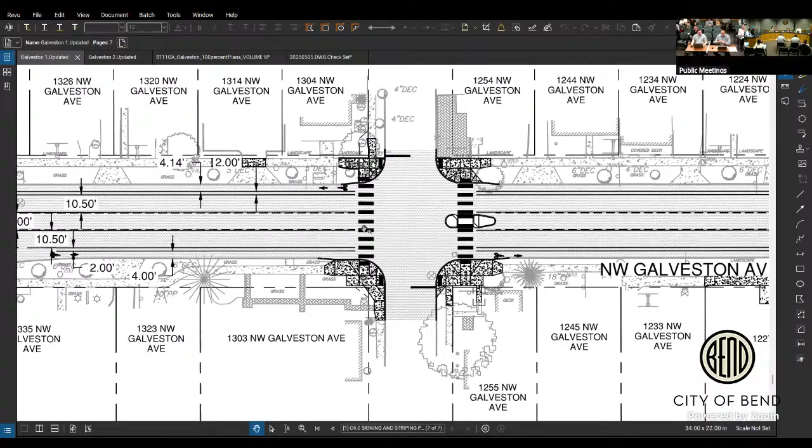Maybe the one other thing to note is the original design had 5 foot bike lanes. But since the project is no longer proposing to redo the curbing, it's actually about a foot to 6 inches in from where we'd want it to be with a full build out. So our bike lanes are narrowed a bit more than they would be if this was fully built out.

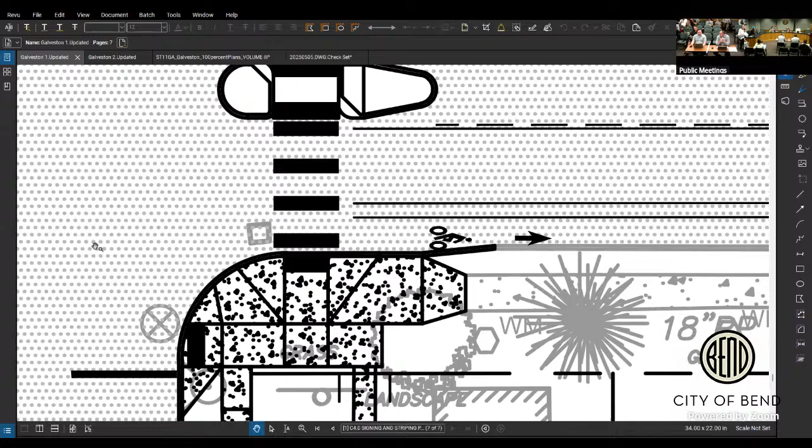You'll notice the ADA ramps for this 30% concept have curbs aligned to where we want them, but there are multiple 10-foot transitions where we're tying back into the existing curb by about 6 inches to a foot at the widest. The idea is that when we build these ramps, if we rebuild the corridor with private improvements or a future project, these ramps should remain - we shouldn't have to rip them out, they're in the correct location. But because of that, our proposed bike lanes will be narrower than typical.

Tying back to the first presentation, one thing we are not doing on this corridor is a significant stormwater improvement, even though we do have a storm drain system that collects water here and discharges to the river. Similar to what happened on Newport, we'd want to add additional treatment and outfall protections, as well as some low impact development concepts, similar to Newport - but we don't have the budget for that. So all that storm drain system work is not included in what's being shown here.

Right now, all we're thinking for storm is any incidental inlets affected by some of those bulb-outs. We'll be building over a couple of inlets, so we'll have to relocate those, but we weren't planning any new improvements.

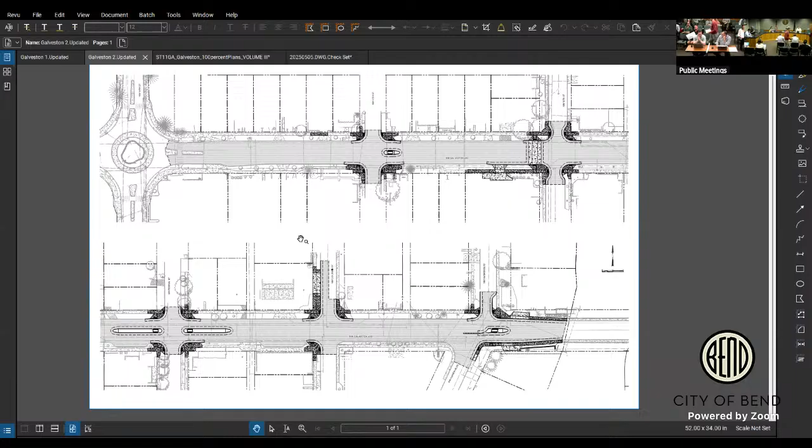Good afternoon, councilors. I'm David Green. I do live in Bend. I use the Galveston corridor extensively on a bike primarily, and occasionally walk it. This is going to be a pretty big improvement over what we have now. I really appreciate the council's or the staff's looking at this in a corridor approach rather than the typical project approach that we've seen for many years. But looking at this all the way from essentially the end of Skyliner through the bridge is a really big improvement.

They've made a start at slowing traffic on this corridor. That's the largest problem on this corridor. The speed of traffic through there is frightening for people on bikes. The new crossings, especially west of 14th, are going to start to slow traffic if those get built. And the idea of a raised crossing at Riverside is going to change the flavor of the corridor dramatically for drivers.

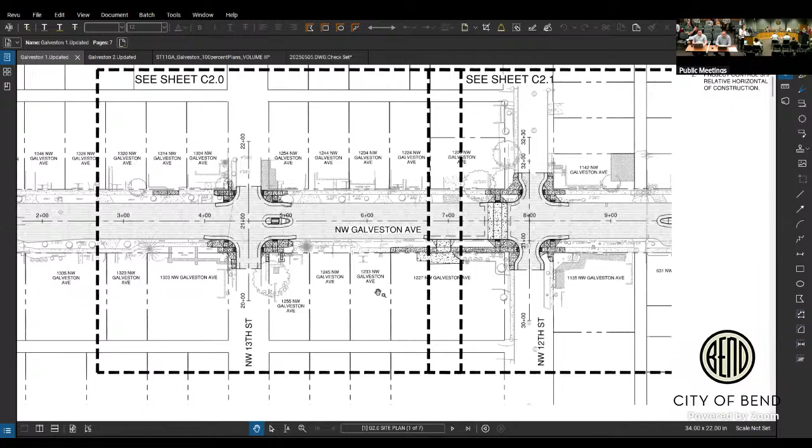I am still a little bit concerned that just the crossings are not going to be enough to slow traffic to really make it comfortable to bike. But I'm certainly hoping that it will, and I'm really interested to see how drivers react to this, because it's still going to look pretty wide with the 10.5-foot lanes plus the 11-foot center lane plus the bike lane, which looks like a traffic lane to most drivers. So I am concerned about that, but I think this is a really big step forward, and I hope we can get this done. So thanks.

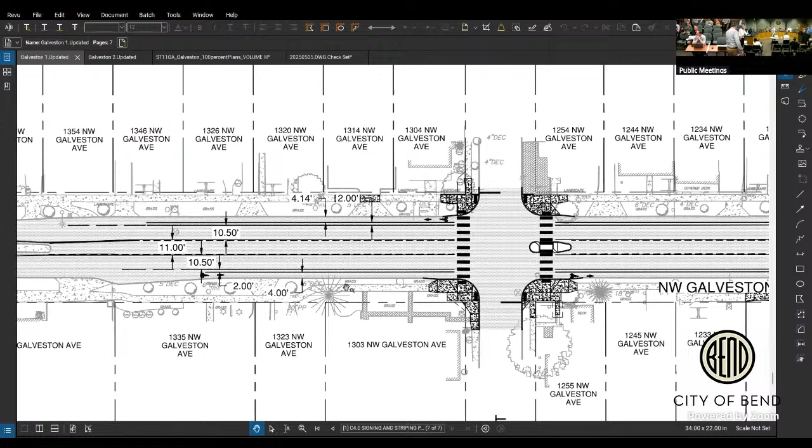I'm a business owner in Galveston, so thank you for the invite. We have not had a great amount of communication in regards to the process, so that's number one. Love to see more reaching out to us small business owners that are represented here and get us in the loop. And I know you had a 10-year process, and we had some designated representative that obviously did a nice job on it. So secondly, this looks to me like, I'm happily surprised as to what I'm seeing, so thank you.

I know it's a budget issue as much as anything else, but we've had some struggles as small business owners, obviously, through multiple revenue blockers for us, so to speak. But this seems to me like a great balanced approach to getting the bike community, a safer walking community, and then having us being represented and the budget being within line of what we'd like to see. So I understand that you have less money, a lower revenue cycle moving forward. I struggle to see how we continue to build roads that are massively more expensive to both build and then maintain down the road when you have a declining funding mechanism. So this strikes a good balance with me, so thank you.

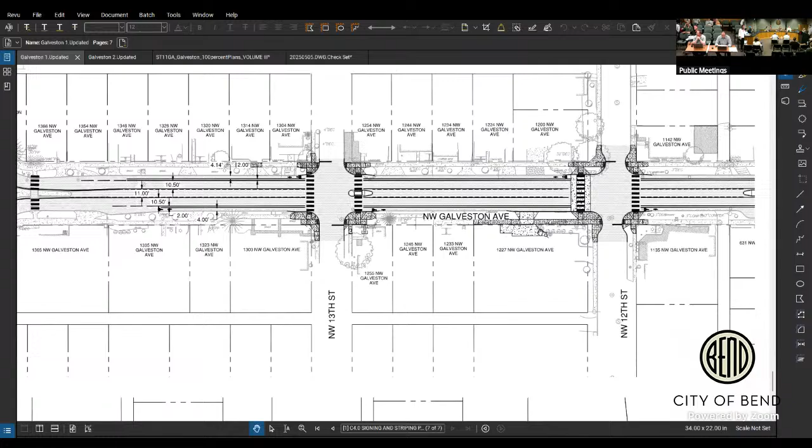Thanks for listening to me, having me. I thought this was a Q&A. I didn't prepare like a minute to say it. I thought you guys would respond. So I'm a little disappointed that there's some miscommunication there between us. But I have a lot of thoughts. I could talk for a long 2 minutes. We can't do Q&A, I mean, we're not stuck on this at all.

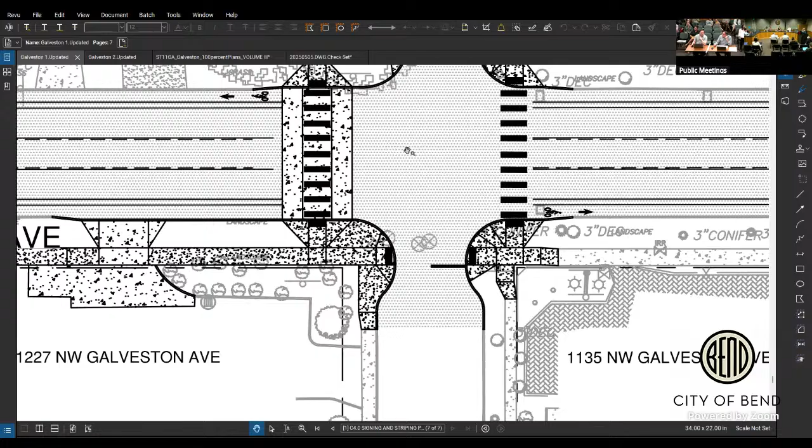Short answer would be no, just because of the on-street parking there. You wouldn't be able to physically get ramps up and down to do a raised crossing there without a big modification to that on-street parking, which is one of the few we have there. If you look at 12th, to get up 6 inches, build a flat top that's 8 feet wide and go down 6 inches, you're looking at something that's 12 to 15 feet wide. You just physically can't fit it there on Columbia.

So we did look at a bunch of different locations to where we could do these raised crossings, based off the one proposed with the park project and then one more to the west. 12th was kind of the main crossing that was feasible to build physically and worked with our system. So we looked at multiple locations, but decided on 12th due to those factors. If we tried to do something on Columbia, we'd likely have to remove that on-street parking.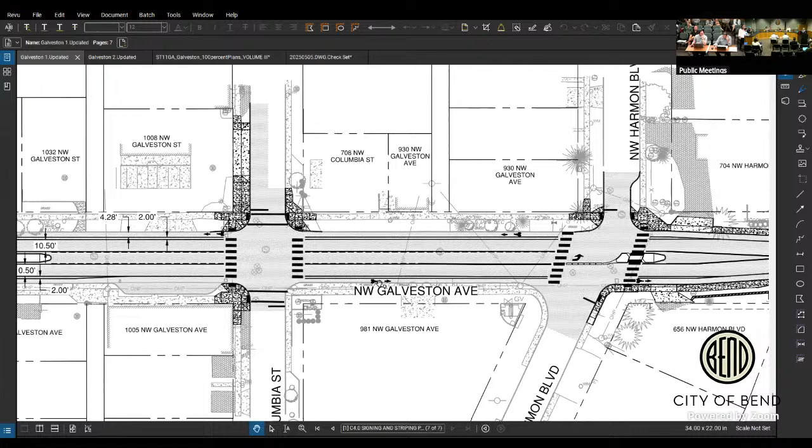You said west side of Columbia though, right? Yeah. Is there a reason why you prefer west side and not east side? I think there's a higher level of traffic crossing on the west side than on the east side, going from the lots to those businesses on the west side.

And like Ryan noted too, with us meeting with fire, they were okay with us pursuing these on a corridor type aspect, but they really wanted to limit the raised crossings too, due to the same reasons that Ryan brought up.

Although, in my opinion, they had a bigger issue with the islands than the raised crossings, especially on this corridor, due to nowhere for people to go if lights start flashing. If anybody stops because lights are flashed, they're at a deadlock and can't get through. We always have to remember Galveston is an arterial, meant for big vehicle movement in the city. This is a very unique arterial due to speeds, businesses, everything. But fire is very keen on this project, because it's really limiting their east-west access across the city with some of these improvements. So we need to continue those coordination conversations.

Ryan, I know you told me before, for the Franklin section it's like 12,000 cars, right? Do you know the volumes on Galveston? I don't have it off the top of my head, but we'll look it up. Janet, do you happen to know? I honestly couldn't tell you off the top of my head. I can't remember what it is. It's more than it was 10 years ago, I know that.

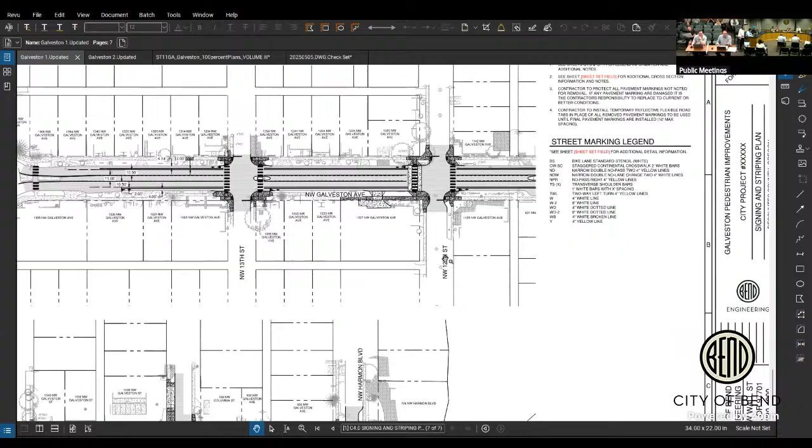So, look at other ways to get rid of the bulb-outs on 12th. Look for other areas to try to incorporate design safety options. Look into something more than just paint in the bike buffer. So those are all things that I think we still need to investigate further, but if you have any direct guidance now, we can hear it.

I mean, just picturing it in my head and picturing a beer truck sitting there, it just, I think this concerns me.

This doesn't represent such a fundamental shift from the process that has occurred before that I think it warrants another round of extensive engagement. I do think it's important to work with the businesses to make sure there is a traffic flow plan for things like deliveries so that's accounted for. So I don't know that I could give direction specifically about saying we should eliminate these bulb-outs or keep them without following up on that. So I think that's important to do.

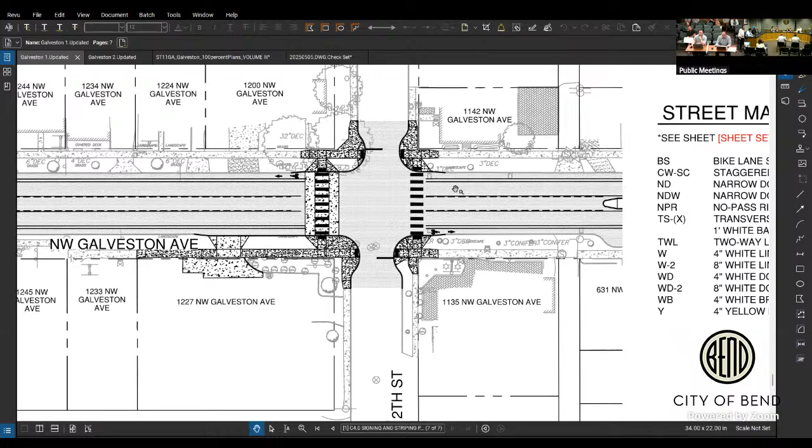But otherwise this has been very, very helpful. Just as a quick overview, there are the bulb-outs here on 12th, there's obviously this one here on Harmon that we're also narrowing. But one that's not very clear is the reason we're rebuilding so much of this length on Columbia: the curb line, you can kind of see the hatching here, is actually back here. So we are narrowing this whole stretch of Columbia also, and that one's not very clear unless you're switching back and forth between the existing conditions. So those are the 3 locations where we are narrowing the widths of the side streets, just so everybody's aware.

I would just encourage particularly any businesses here on Galveston to not speak now, forever hold your peace, but now is the time if there are some unintended consequences, like what was brought up today.

Great, oh, got a bunch of people for that. Come on up. Yeah, come on up. Yeah, come on.

My name's Fred Nickel and I live in the area, and all I have is questions. What is this project's design traffic volume designed for? Do you have a maximum?

We don't have traffic counts. This is a very non-traditional arterial street, so designing it as an arterial for 20,000 vehicles a day isn't a realistic target because of the environment out there. The volumes are going to be what they're going to be. In 10 or 20 years, will it be busier? Absolutely. But there's not a target ADT we're trying to hit with these improvements.

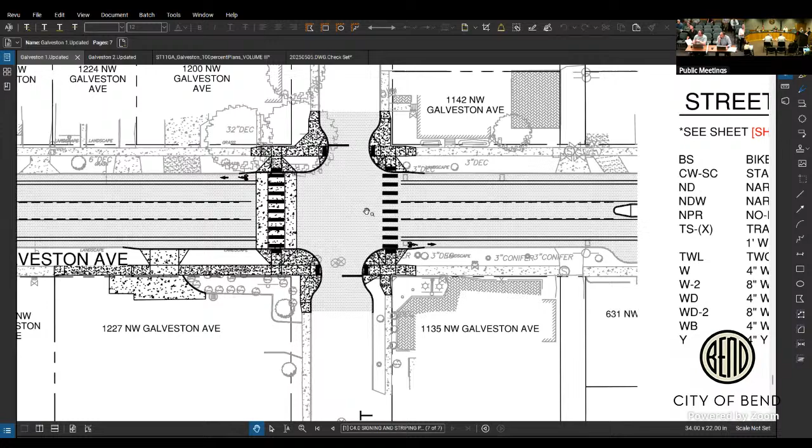I have a couple of questions, and I may have missed this. You're gonna do this in sections of the road, is that correct? So what do you remodel in sections?

Well, there are primarily three phases to this. There's behind the curb line, there's curb to curb, and then the overlay of the whole street sometime in the street preservation program next year.

But yeah, as far as the sidewalk and redoing the ramps and everything, yeah, to make them ADA compliant, since it's right in front of our building.

About how long is that gonna take? Yeah, that's a great point. We're not gonna tear every corner up all at the same time. We would take a systematic approach, west to east or east to west.

If you're talking about one particular intersection where we're doing all four corners, that could take a few weeks - just to tear out what's there, form up the new forms for the concrete, get it poured, wait for it to cure, and put the truncated domes and other stuff in there.

I'm just wondering, because like some of the other businesses, we do a lot of it outside. Absolutely, yeah. And I believe you're taking a good 10+ feet of our landscaping where we place tables.

Well, do you want to go look at the intersection? The other thing you know down here too...

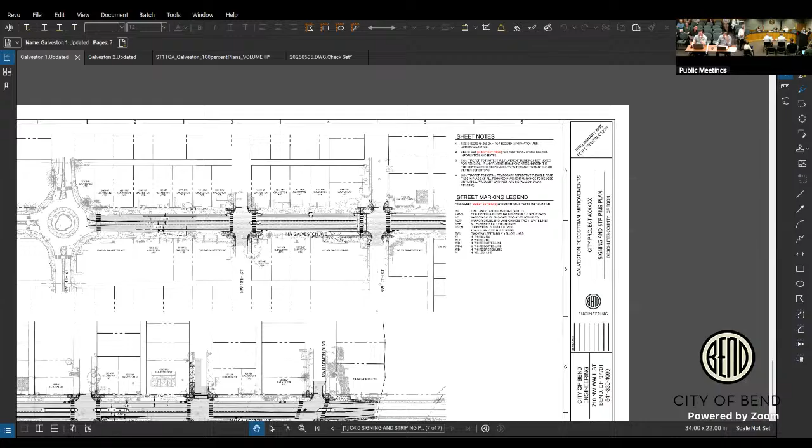As they do this, they'll also make sure that the pedestrian system always works during construction. They will sequence construction and have proper signage to make sure pedestrians can still get around the work zones. So it's like doing each corner - you'll do all four corners at once and then move on to the next one?

It depends on what's most efficient for our crews. I mean, you could just do one corner at a time, sure, but typically if they're there, they're gonna try to do as much as they can.

Okay, and then also, because we have two large trees in the front that would be where you guys are redoing that sidewalk and putting the bike lane in, are they getting removed?

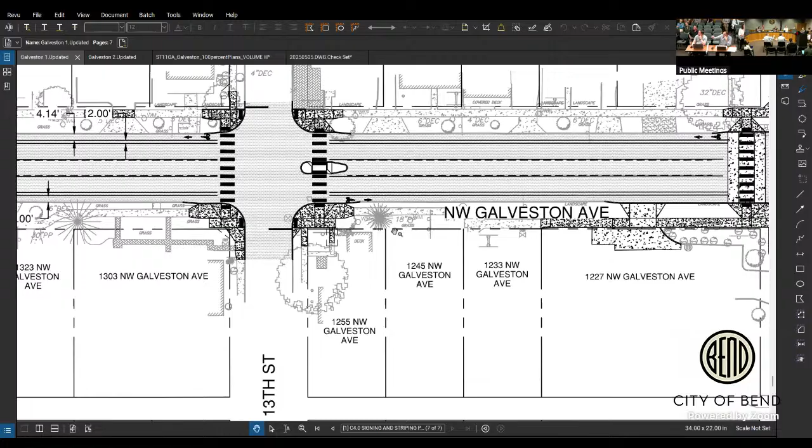So you're right here on 13th Street, right? At the corner? Yeah, 1255. Yeah, so this is the extent of kind of what we have proposed today.

So a little bit of sidewalk going south for that connection. It looks like Dustin's proposed to rebuild the connection to the patio and the deck that you have there. Okay, so we have the fire pit that runs along the front of this deck.

So it looks like your sidewalk is gonna come right up to our fire pit? No, so the existing trees where they sit, and the existing sidewalk closer to Galveston - it's just the darker hatched area.

Okay, and does this remain where we have ours? Yes, that would all stay the way it is. Oh, nice. Okay, I thought it was coming up, because I know our property line is a little farther than where we're landscaping, normally, but I didn't know.

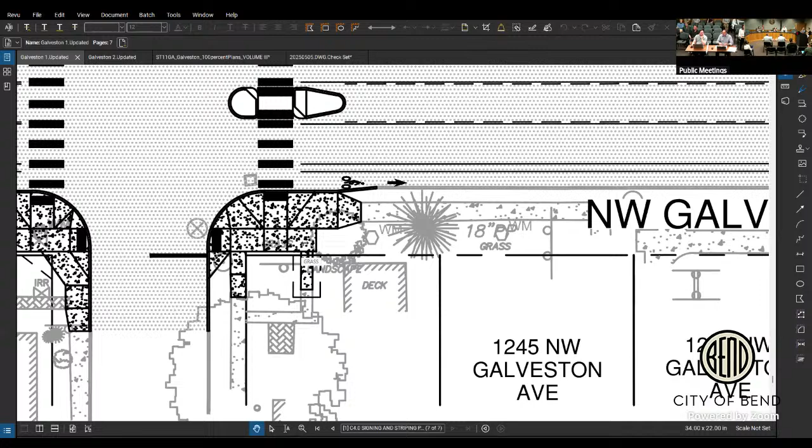Yeah, and we're happy to come out with you with this design concept now and just put some stakes in the ground and say this is the limits of where the new sidewalk would be. Great idea, love that. We're making sure to save this tree too - I don't think we're proposing any trees coming down. Okay, that makes sense.

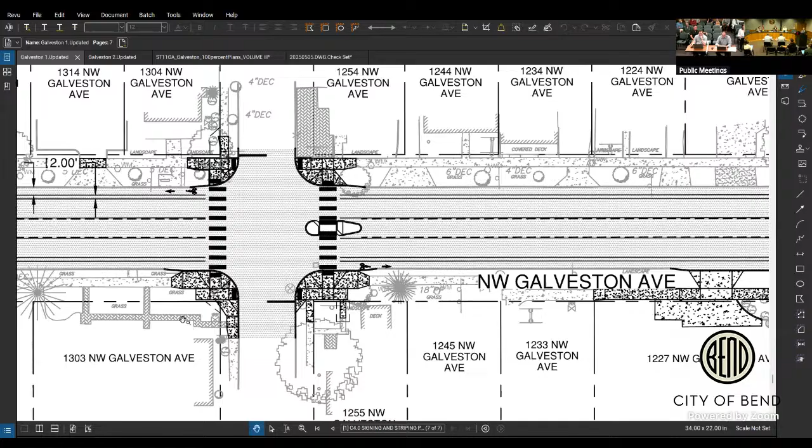Yeah, I think they don't come at a set time, they can come all day long. Most cities, till 2 o'clock, let cargo come at 1, but there's pedestrian activity. It works out for us. But we heard today that that's something we can't control being where we live. They don't do that. I mean, having so much more pedestrian activity would make your business so much better. Well, not if you don't have product, because they can't deliver it.

I would say we generally encourage people to email council at all@bendoregon.gov, and we can make sure that your comments are routed to the appropriate staff. Is there anything different that you would recommend in this case, or do you think it's helpful to have everybody on the same page and receive everything?

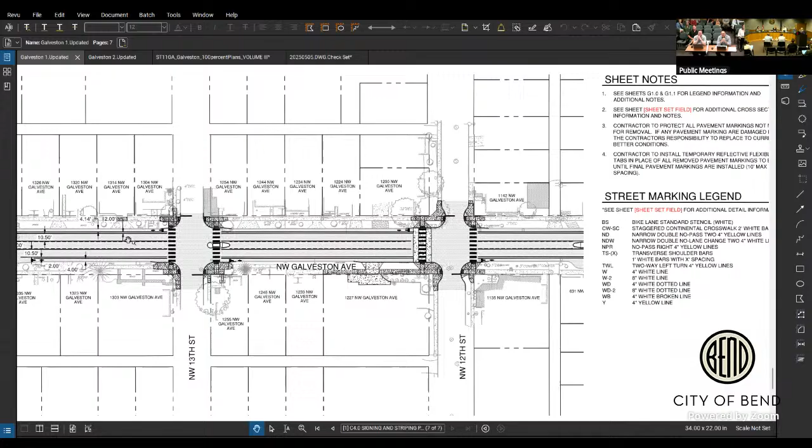Yeah, I think what we're hearing more is that maybe we need to have, I say we, and it's not us, you all, have some specific conversations with some of these businesses. Happy to do that. Sounds like a lot of the things we talked about today have already either been addressed, or I'm assuming you feel a little bit more comfortable about it.

And let's remember too, the intersection at 12th, I think, was chosen for the bulb outs because, as I heard you guys say, we have actually had crashes there and we have had injury interactions there. So that's why that's there. Maybe if the bulb out can be widened just a little bit, I don't know, obviously the design is in your hands, so, great sidewalk.

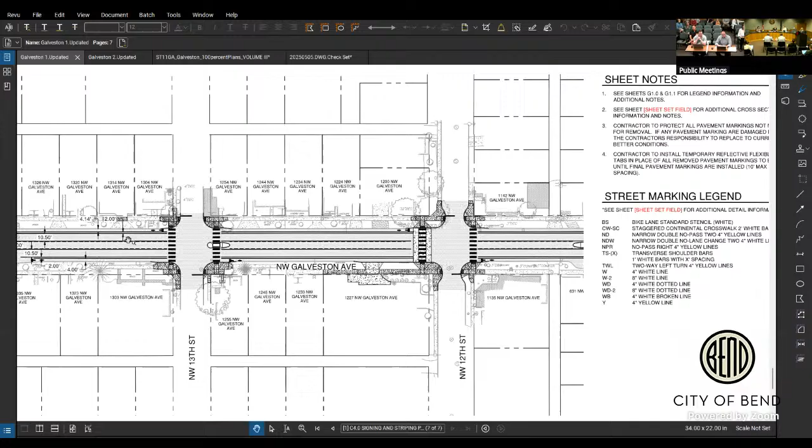So what we can also do as we move forward is, there'll be a report out at the next council meeting. We don't normally do that, but we can also have Ryan and his team come up with some information, get that out in the council memos, and then have further developments come up. We can, at this point, use the weekly memo as a way to keep council informed of what's going on, if that works.

So my two takeaways now are, say three, I guess. Number one, let's take a deeper dive into the bulb outs at 12th to see if we can come up with a design solution that'll allow the truck turning movements and deliveries to continue unimpeded, at least a traffic flow plan.

Yeah, deliveries, absolutely, but it may mean leaving them where they are. The two options are do what's proposed or leave it as wide as it is, right? So can we find a happy medium in there? Continue to look at enhanced protection options on the buffered bike lanes, more than just 2 stripes of paint, again without having too much direct impact to turning movements into driveways, alleys and other things. So again, try to find something in the middle there.

And then no need for a large round of public engagement, but definitely continue to engage individually, block by block, business by business as we develop the concept further. And update the website, thank you. Yeah, let's go. Those little things.

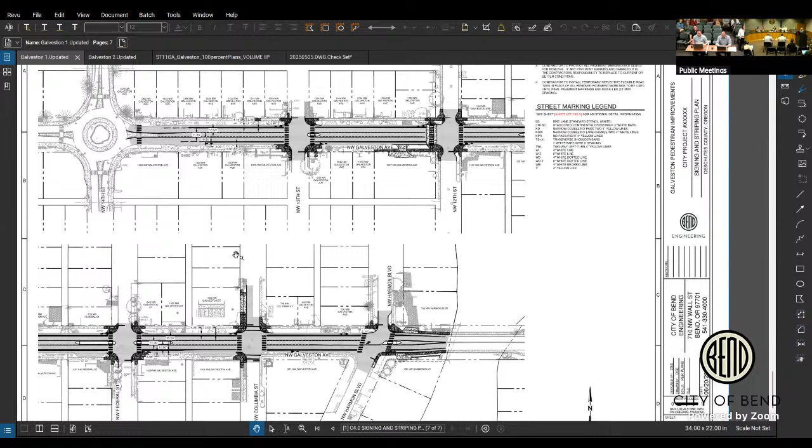Thank you, this is, I wish all of our meetings were like this. We heard from everybody, and so many different things that were brought up today. So thank you all for being here, appreciate it. All right, we done? We done. We adjourn. Thank you, thank you everybody.